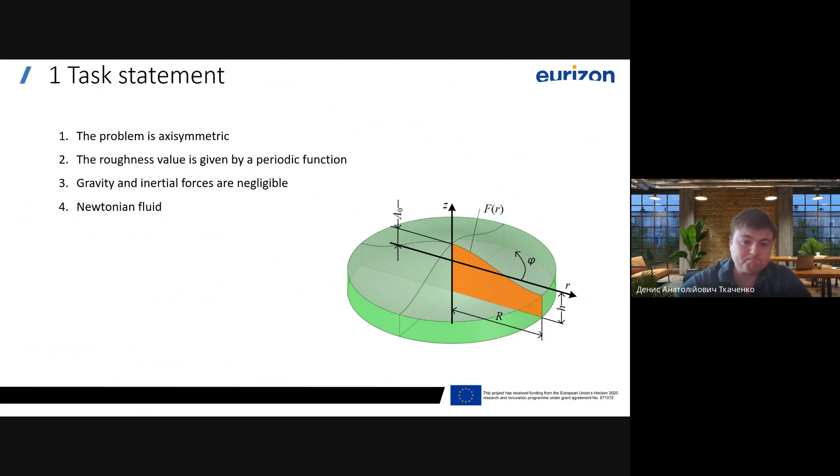The mathematical model is based on the Navier-Stokes and continuity equations in polar coordinates adapted for an axisymmetric configuration. Given the small scale and low velocities involved, we neglect gravity and inertial effects, focusing solely on viscous and surface tension forces. Boundary conditions include no slip at the bottom surface and stress balance at the free surface, where surface tension is described using the Laplace equation.

Due to axisymmetry, the surface curvature is determined by two principal radii derived from the free surface function. Symmetry conditions are also imposed at the radial boundary. Together, this forms a complete model for surface leveling driven by surface tension in a viscous liquid.

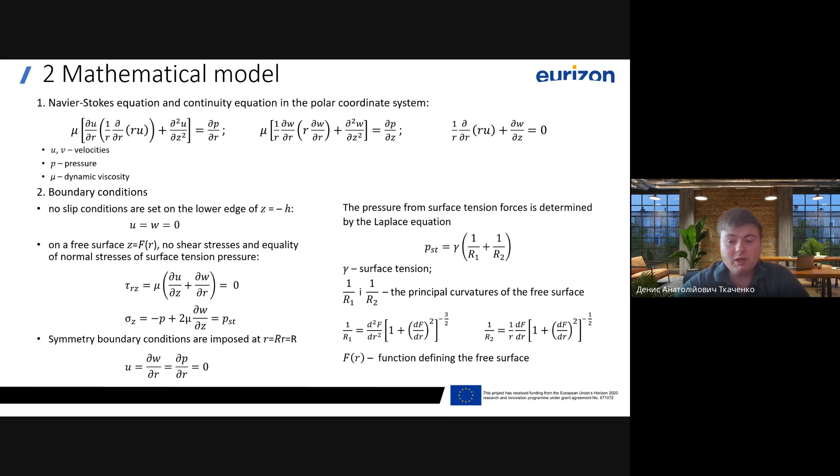To solve the problem, we apply separation of variables in the axisymmetric domain, using Bessel functions as the basis. The velocity and pressure fields are expanded into a series that automatically satisfies the boundary condition at the symmetry axis. Substituting these expressions into the governing equations reduces the system to ordinary differential equations in the vertical direction.

These are then integrated, yielding closed-form solutions that depend on a small set of integration constants. The constants are determined by applying boundary conditions, including the stress balance at the free surface, where surface tension acts as the driving force for leveling. The shape of the surface is expanded into a Bessel-based Fourier series, and under the small gradient assumptions, the curvature simplifies accordingly.

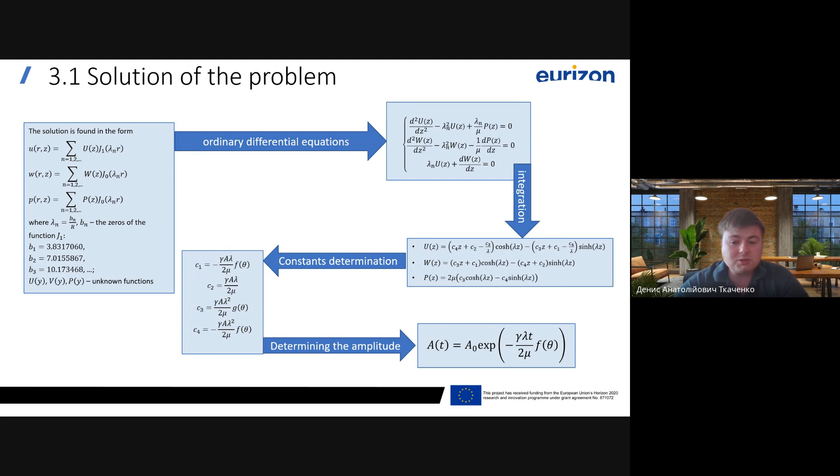This process leads to an explicit differential equation for the amplitude of a surface irregularity. Its solution, shown in the final formula, demonstrates exponential decay of the amplitude over time. The decay rate depends on material properties, geometric parameters, and the function f of theta, which captures the effect of layer thickness relative to the feature size.

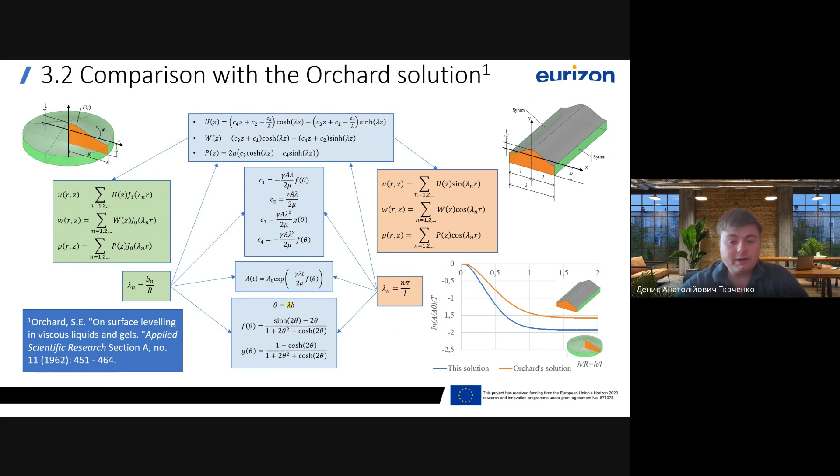Compared to the planar case described by Orchard, the axisymmetric formulation shows a faster smoothing rate due to the added circumferential curvature, which increases surface tension driving pressure.

To validate the analytical model, we compare it against numerical results obtained using the incompressible smoothed particle Galerkin method implemented in LS-DYNA. This is a meshless Lagrangian-based approach tailored for simulating viscous fluid with free surface, surface tension, and fluid structure interaction. In our simulations, 1/4 of the domain is modeled with radial size 5 millimeters, and Newtonian liquid with properties similar to cooking oil is used.

To eliminate inertial effects entirely, the fluid density is set to a negligible value of 1 kilogram per cubic meter. Free slip is imposed along the vertical boundary with a 90-degree contact angle, and a no slip condition is applied at the bottom. Simulations were performed across a range of average layer thickness and initial amplitudes, enabling a comprehensive comparison with the analytical predictions.

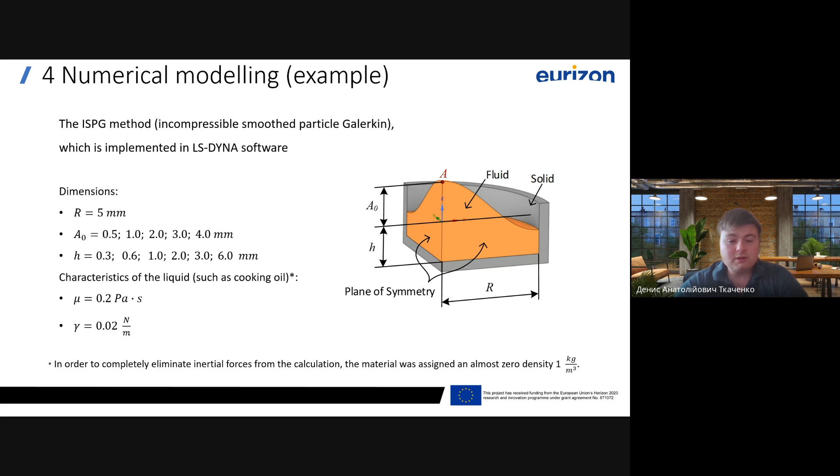A qualitative comparison of the analytical and numerical solutions is shown using the velocity and pressure distributions at the initial moment for a representative case. Both approaches capture the same overall flow pattern: radial velocity peaks near the center and close to the surface, while vertical velocities are concentrated at the center and edge of the free surface. Pressure profiles show similar distributions with minimal decay into depth.

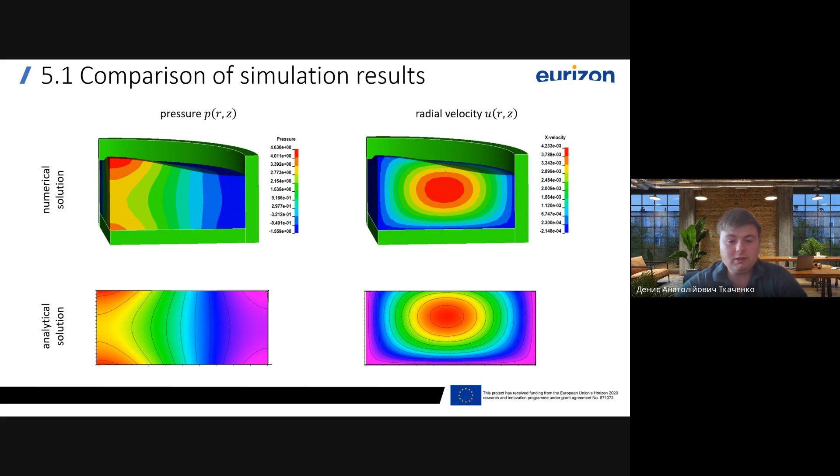Amplitude evolution over time was also compared to assess the analytical model's accuracy. The focus was on the simplification introduced at the upper boundary, applying the boundary condition at z equal 0 rather than z equal free surface coordinate, using simplified stress components and neglecting the curvature denominator. These are absent in the numerical model, which solves the full system.

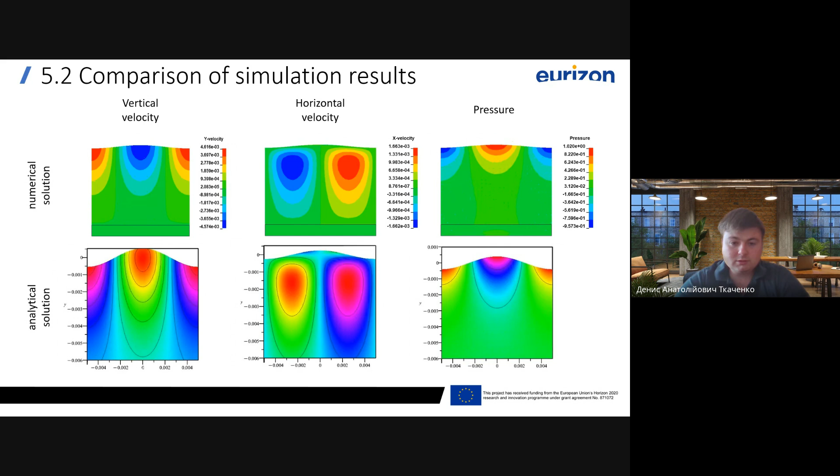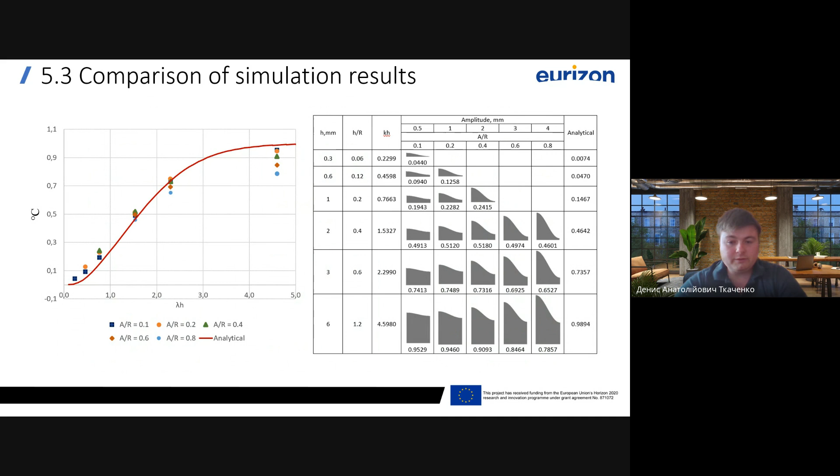In the heat treatment of plastic surfaces, the temperature distribution follows a heat flow equation, and in the molten surface layer, it's approximately linear. If fluidity is assumed to be proportional to temperature, viscosity varies from a finite value on the surface to infinity at the solid phase. In this case, the governing differential equations are modified to account for the variable viscosity. The solution involves modified Bessel functions, which describe radial and vertical velocities as well as pressure distribution.

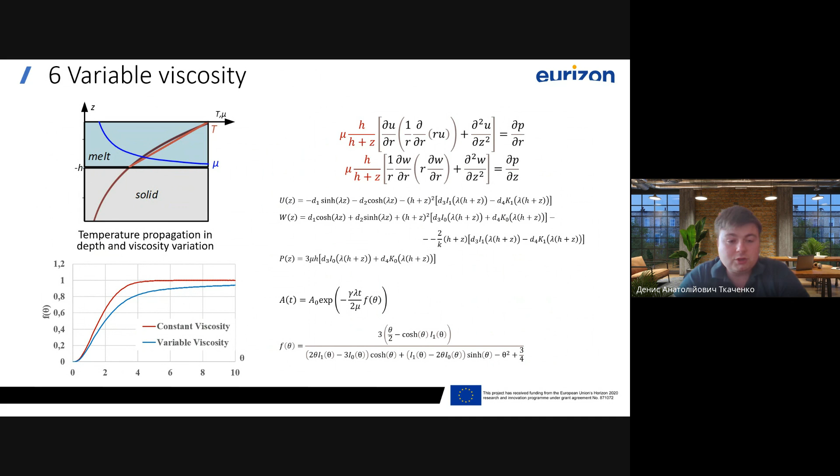To conclude, we have extended Orchard's formula to address axisymmetric problems, allowing us to develop an analytical solution that aligns well with numerical results for moderate and thick layers, where the thickness exceeds 20% of the radius. This solution remains accurate for initial surface amplitudes up to 40% of the radius. We also derived an analytical approach for variable viscosity across the liquid layer, which applies to both periodic and axisymmetric problems. This provides us with a straightforward method to calculate the time required for surface smoothing.

The primary goal of our work is to determine the surface smoothing time, which is defined as the time needed to reduce the surface roughness by a factor. Using the derived formula, we can calculate this time considering factors like dynamic viscosity, surface tension, and the surface shape. For surfaces that deviate from standard Bessel or cosine shapes, we can approximate the smoothing time by using the first term in the Fourier series expansion of the surface shape.

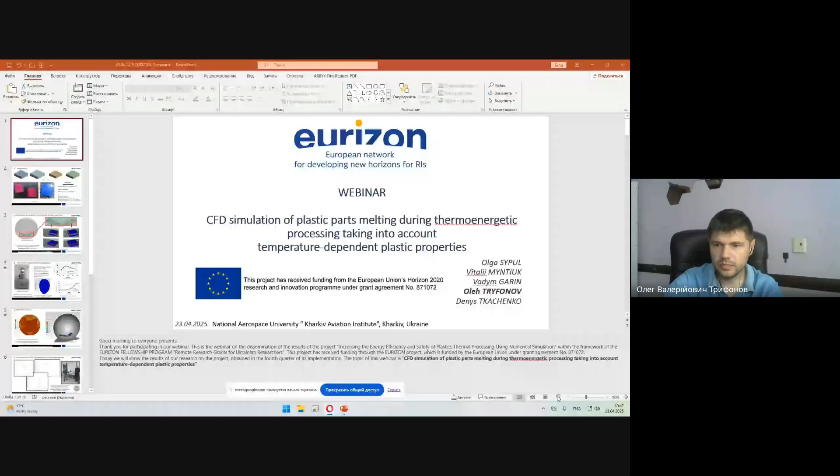Do you see it? Yeah.

Okay, dear colleagues, let me introduce results of our research within the Horizon project. The topic of our investigation is CFD simulation of plastic parts melting during the thermoenergetic processing, taking into account temperature-dependent plastic properties.

We already did some tries to simulate the melting process within the thermal processing of plastics, and we used such parts which you see on the screen. A specific feature of these parts is some small parts like bars on the top face and on the edges. These samples are needed to investigate the influence of part size and small object size on the melting process.

And it is important in plastic treatment, because in plastic parts production a lot of such bars can be formed during the processing. But during our previous simulations, we used some assumptions. The first assumption is constant properties of the plastic, and we have used polycaprolactone PCL plastic. So all of them don't depend on temperature.

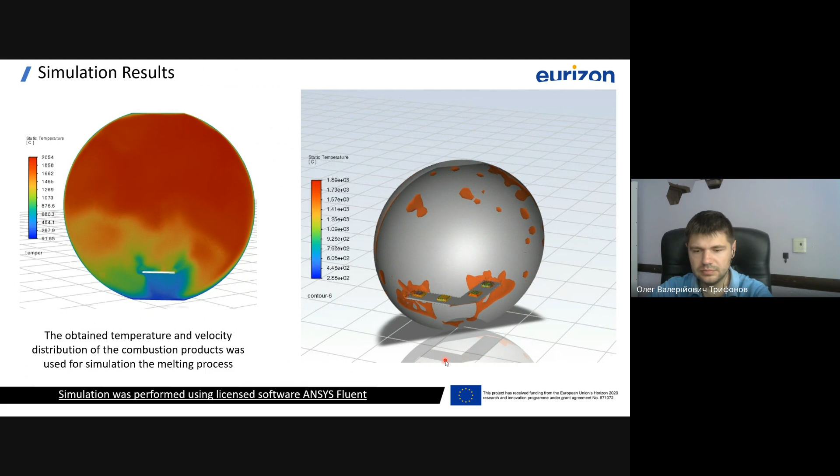Another very important stage was determination of temperature-dependent properties of the plastic. These also were obtained with support of our colleagues from Warsaw University of Technology, Faculty of Power and Aeronautical Engineering, Institute of Heat Technology in Poland. They helped us find heat capacity and thermal conductivity in dependence on temperature, and these properties are very critical for correct simulation of the melting process at thermal processing.

And on this screen we can see the simulation of the melting process, but to define the influence of temperature-dependent properties, we have simulated two cases. The first case is application of the real distribution of temperature and flow field inside the chamber, but constant properties of the plastic. And the second, more complex, is real temperature and velocity distribution and temperature-dependent properties.

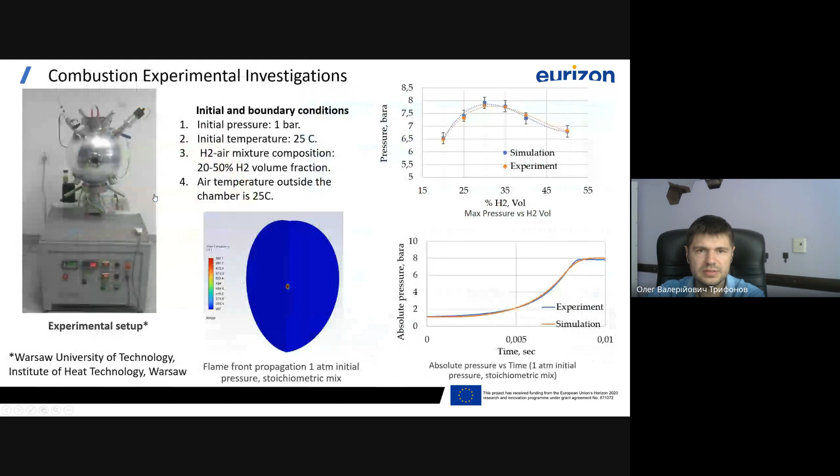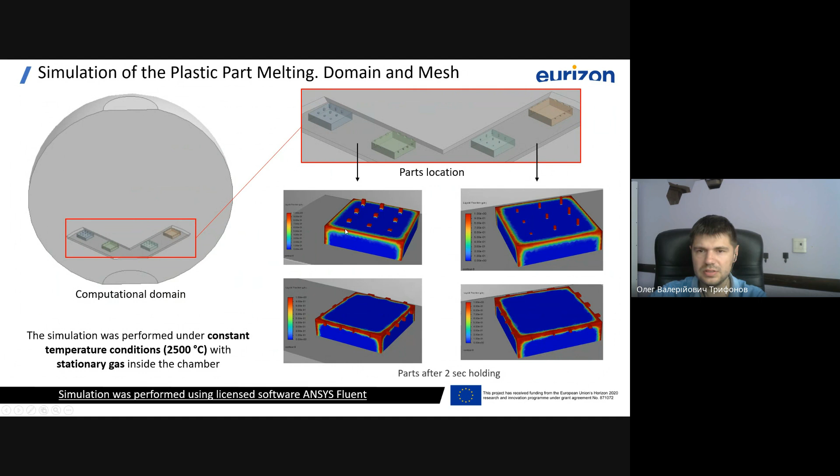On this screen we can see the result for the case with constant properties, and we see that the boundary layer of the part very fast heats and melts. After about 0.1 second of holding time, almost all surface is melted. If we compare with the results at unmovable, uniform temperature conditions, after 2 seconds we have melted only bars and edges. It means that the flow field near the body is very important, and increase in velocity also causes increasing heat fluxes. That's why after 0.1 second we almost melt all surfaces of our parts.

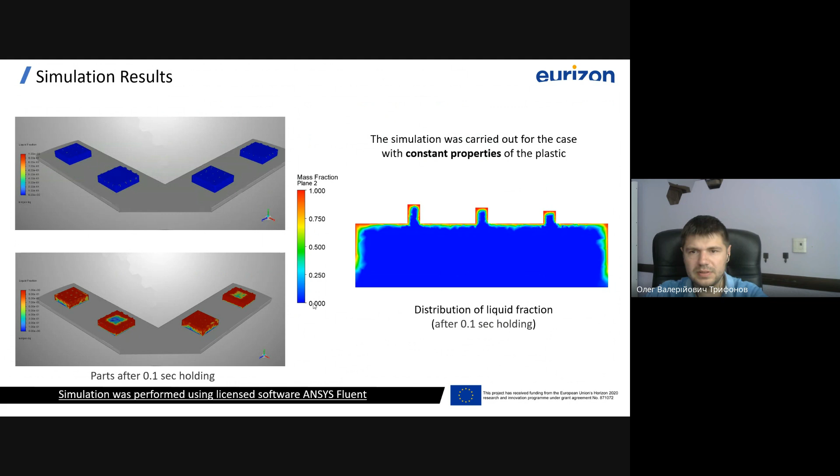But after applying temperature-dependent properties, we see a bit different picture: the process of melting is not so fast, and within the same time melting takes place only on the bars and small elements of the parts. It means that temperature-dependent properties sufficiently influence the simulation result, and we observe approximately the same picture in experimental investigations, which will be presented in our further articles and publications.

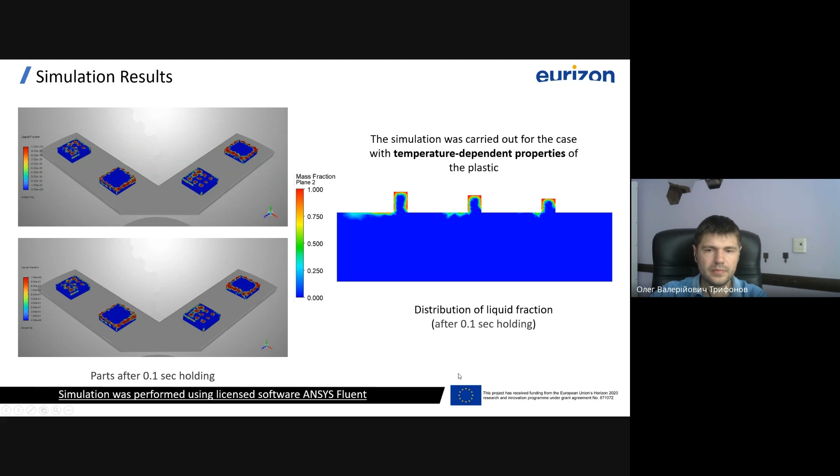And for comparison, we can see that the influence of temperature-dependent properties is very important. For constant properties, during the same time, we have almost all surfaces melted. For the case with temperature-dependent properties, we melt only the small features of the part, like bars on the top surfaces and on the edges. The same if you look at the depth of the melted layer: for constant properties it's much bigger.

So, if we talk about the conclusions and further investigations, we still understand that the simulation of the plastic melting process is a very complex and resource-intensive task. Application of temperature-dependent properties increases simulation time by maybe 10 times, because it requires a smaller time step for the simulation. Of course, temperature-dependent properties are very important, because these properties allow us to represent the real melting process.

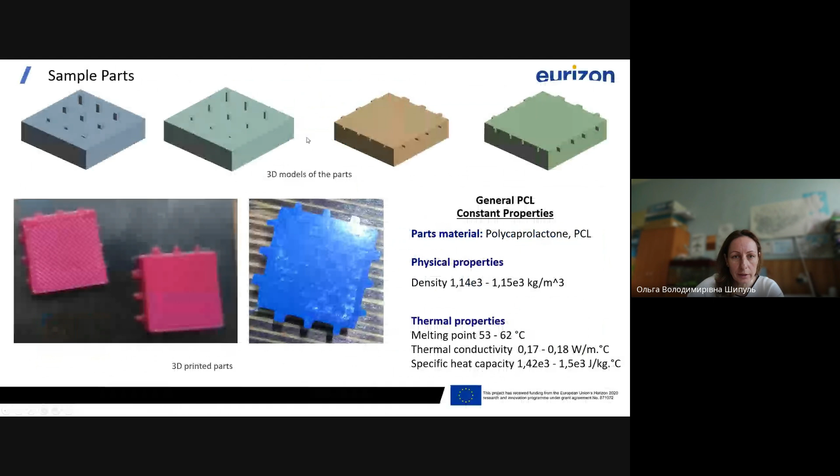For whoever will be interested, on your first slide there is not the title of our project, but if we remember, it is increasing efficiency of using green hydrogen fuel mixtures in treatment technology processes focused on plastic treatments. How can we say whether this type is useful or not? We have not talked about other fuel mixtures. Why do we need to use it, what are the pros and cons of using green hydrogen, and what are the initial conditions at the start of the process? I mean, low pressure and so on. May you please repeat it one time?

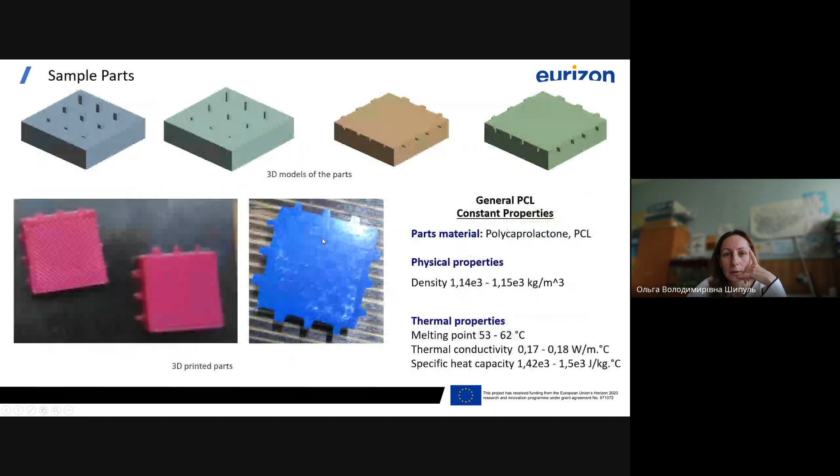Of course, our work is very important, I mean, in the aim of increasing the efficiency of treatment using green hydrogen, because first of all, our models allow us to decrease the number of experimental investigations, and of course, our research allows us to more exactly choose regimes of processing, and of course this increases the total efficiency. We will use less fuel mixture, we will get less combustion products released into the atmosphere.

Finally, very positive, we actually increase total efficiency, because as I said, we use less fuel and we increase final productivity of the processing. So yeah, thank you. It's very important. And we have performed together with Vadim experiments on our plastic parts using hydrogen with Polish colleagues. So it's also experimental application.